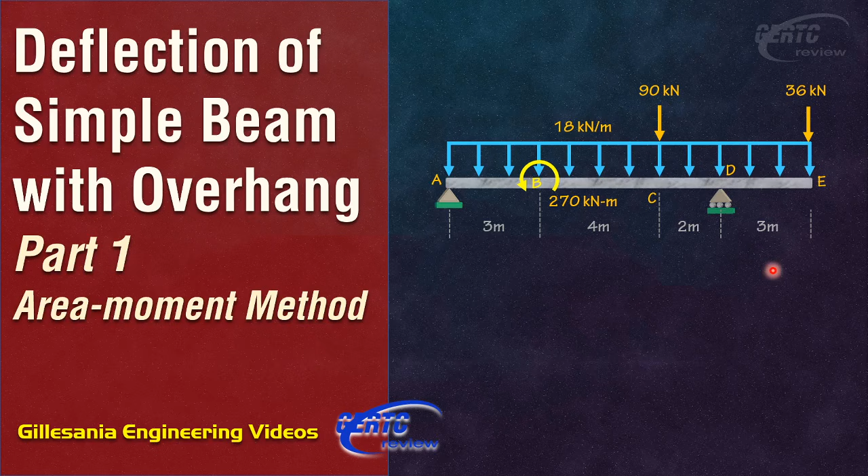Okay, so let's have the problem. Determine the slope and deflection at points B and E of the beam shown. Let's assume EI, the flexural rigidity, is constant throughout the entire beam. The beam is loaded with uniform load of 18 kN per meter all throughout the length, an applied couple of 270 kN-m at B, concentrated loads of 90 and 36 kN applied at C and E. The total length of the beam between supports is 9 meters and the overhang length is 3 meters.

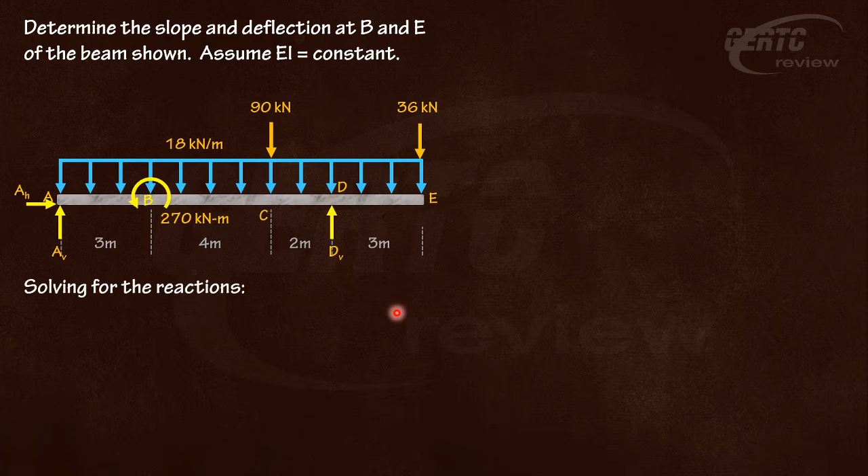Of course, the very first step is to solve the reactions. We have here a roller and a hinge support. A roller has one reaction and a hinge has two reactions. Let's call these reactions AV and AH for A and DV for the roller at D. Summation of moment about point A equals 0: 18 times 12 times 6 plus 90 times 7 plus 36 times 12 minus 270 minus DV times 9 equals 0. So the vertical reaction at D is 232 kilonewtons.

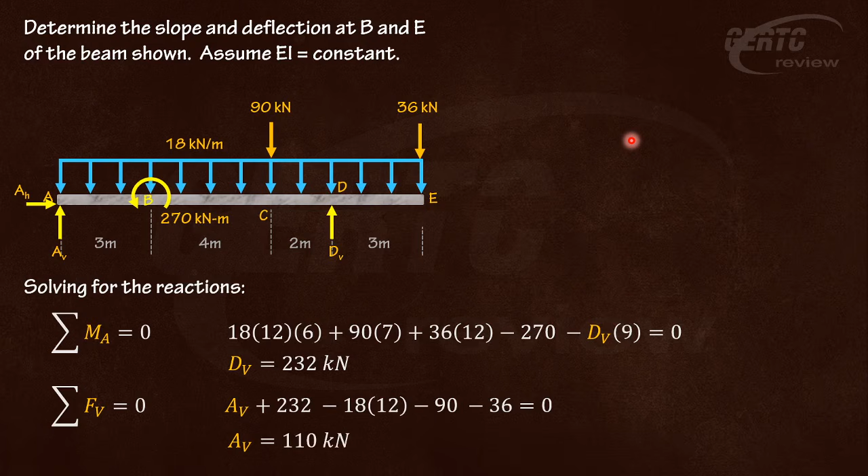Then summation of forces vertical equals 0: AV plus DV, with DV equal to 232, minus 18 times 12 minus 90 minus 36 equals 0. Then A vertical equals 110 kilonewtons. And summation of forces horizontal equals 0, so obviously AH is equal to 0. We don't have a horizontal reaction at A since the loads are all vertical.

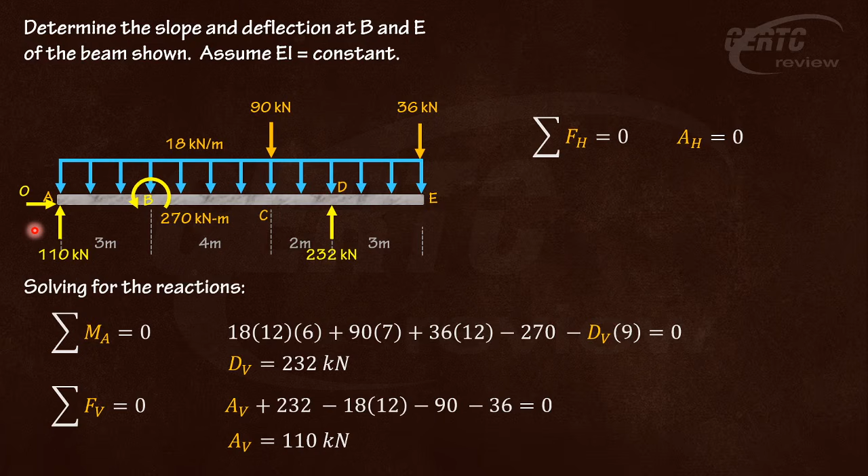Now, let's solve first the deflection at B using the area moment method. Most students draw immediately the moment diagram by parts. That should not be the case. You should do first the elastic curve, and from that elastic curve, you analyze which part you should analyze first and what your reference is. To what point should you take your moment diagram by parts? Let's draw it here so we won't run out of space.

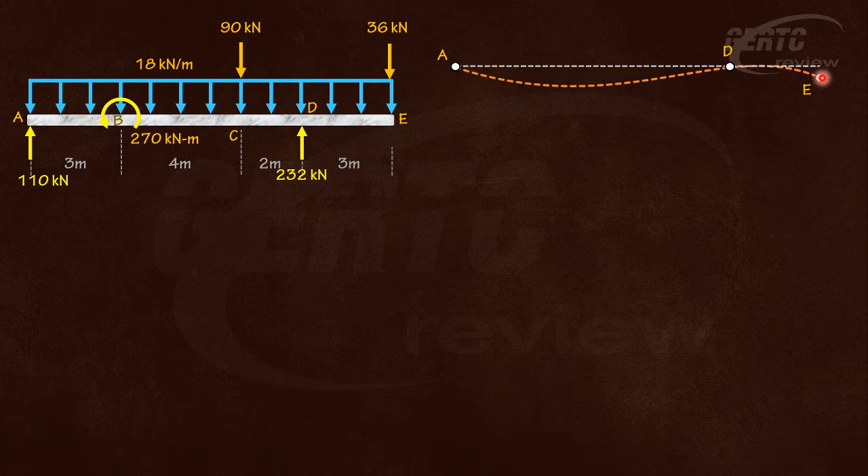Alright, A, and this is our D. This is our elastic curve, just an approximate elastic curve. Since D has no settlement and also A, the points A and D will lie on this horizontal line. Your E, of course, will have a different position; it has deflection. This is 9 meters. So how should you start?

Whenever you use the area moment method, you have tangents to the elastic curve. So where should you start? What's the principle? You start at known points. The known points here are A and D. You can draw the tangent at A or at D, it's up to you. Let's draw a tangent to the elastic curve at A. So this is it.

Now, this is determinate; we know all the reactions. With that tangent, no problem, we can solve all the deviations of the tangent line to the elastic curve at any point. But we will prioritize this one because D is known; D has no deflection. We call this the deviation of point D from the tangent line drawn through A.

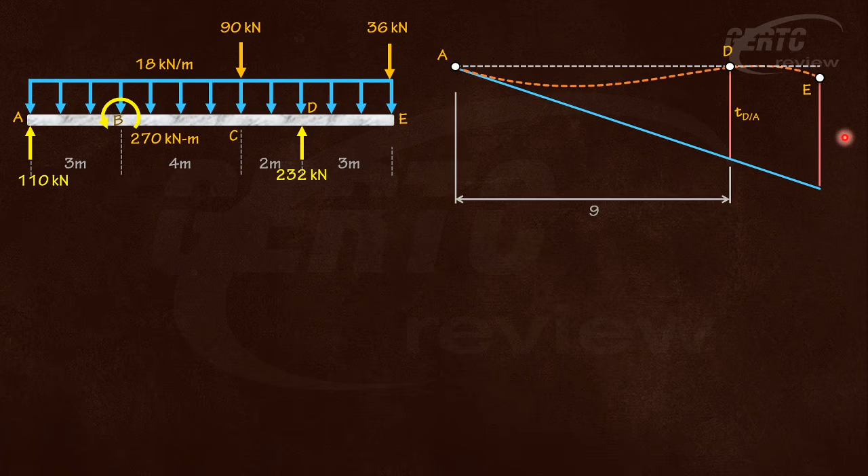Later on, we will also solve the deviation of point E from the tangent line drawn through A. And if we are after the deflection at B, you also need the deviation of point B from the tangent line drawn through A. But we will start from D, because D is known while B and E are unknown. They are known horizontally but not vertically.

Okay? So, that's it. And by the way, this is also your slope already. The slope or the angle of this blue line here, tangent through A, from the horizontal is the slope of that, the slope at A.

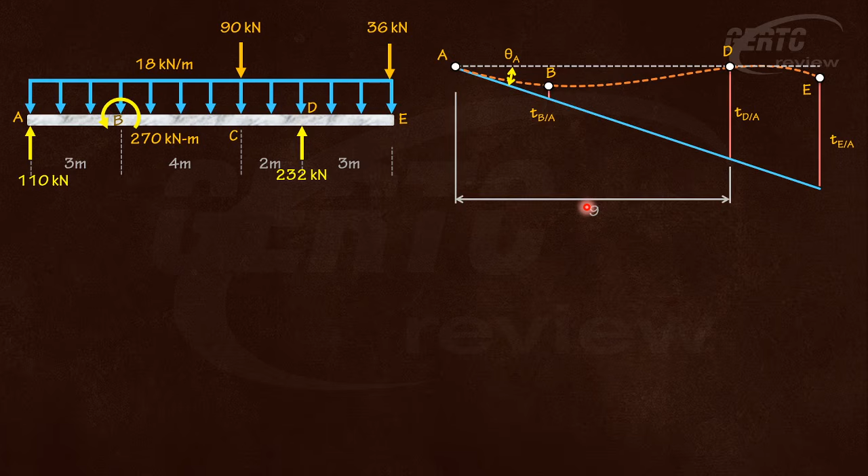Of course, we have to take note of the two theorems involved in the area moment method. The first theorem states that the change in slope between the tangents drawn to the elastic curve at any 2 points A and D is equal to the product of 1 over EI multiplied by the area of the moment diagram between those points. So, the first theorem is for the area. The second theorem is for the deviation.

The deviation of any point D relative to the tangent line drawn through any point A in the direction perpendicular to the original position of the beam is equal to the product of 1 over EI multiplied by the moment of an area about D of that part of the moment diagram between points A and D.

We have discussed that. If you have not watched the first video and you are reviewing area moment, I suggest you watch that video. It's in our playlist, the deflection of cantilever beam. I discussed there fully the principles behind area moment.

Okay, so let's now draw the moment diagram by parts. We want to get the deviation TDA. So I want the moment diagram between A and D only, and the centroid of those moment diagrams from D. So I will draw it about D. Let's draw the moment diagram at D. Dito tayo magre-reference sa D. So ito yan.

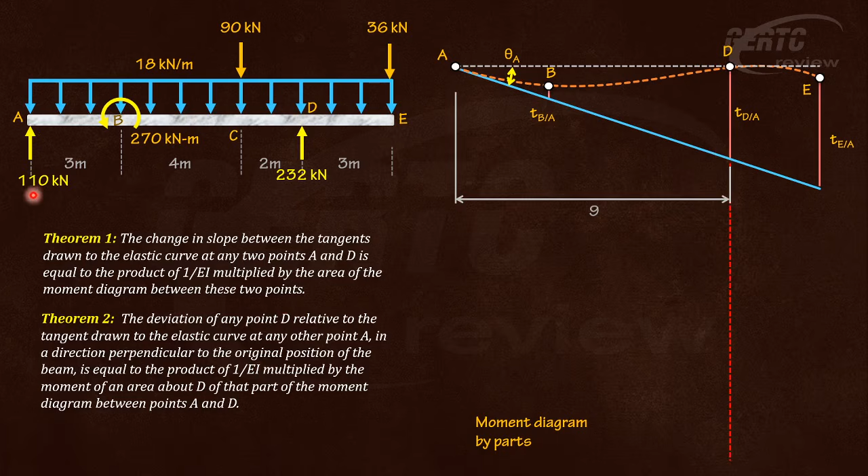Okay, so let's do first the 110. 110, this is a concentrated load, so that is triangle in shape. 110 times 9, so that's 990 kilonewton meter. I will not put the unit anymore. So the area of this can now be solved: 1/2 times 9 times 990, or 4455.

And I also need the centroid of that from the point. The point is D, the tangent is through A, so we are solving TDA. The centroid of that from D is 1/3 of 9, that is 9 over 3, 3 meters.

Then next, the uniform load. Let's do the diagram for the uniform load, up to here only. I don't need to draw the diagram on the right side, because I'm only after TDA, unless we will use it later on. All right. So let's do AD first.

For the uniform load, it will be a spandrel of parabola. This is the shape: 0 and then parabolic, second degree. The moment here is equal to 18 times 9 times kalahati ng 9, 9 over 2. That's negative 729. Negative because it bends down. Take note, I am getting the moment at D, so that is negative moment. That's a second degree curve, a spandrel of parabola.

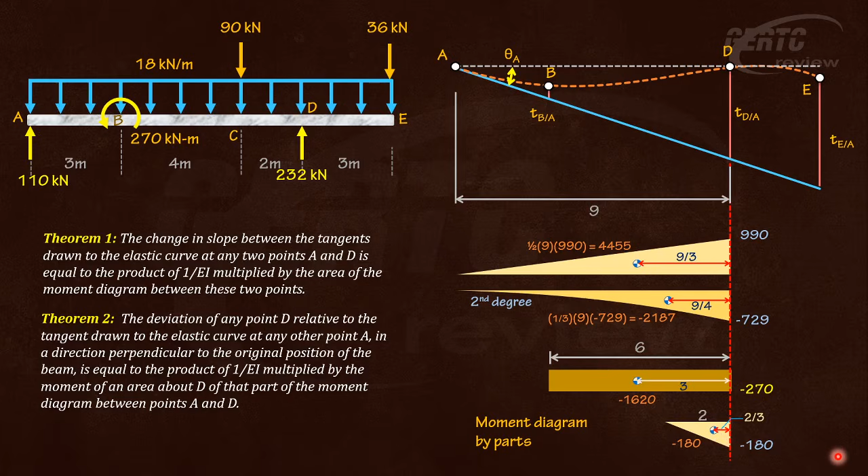So we are now ready to compute the deviation. The deviation of point D from the tangent line drawn through A, TDA, equals 1 over EI times the area of the moment diagram between A and D times the centroid, the first moment of area about D. So we already have the centroid, so we have no problem for that.

Alright, substitute the values. So we have 1 over EI times 4455 times 9 over 3 minus 2187 times 9 over 4 minus 1,620 times 3 minus 180 times 2/3. This is it. Then, if you simplify that, it will become 3,464.25 over EI. Our answer is just in terms of EI.

So, actually, if you have the value of EI, then you can get it in mm or meter. By the way, the unit of this is kilonewton meter cube, because the area of the moment diagram is kilonewton meter multiplied by meter, the area, and then multiplied by the moment arm, making it kilonewton meter cube. Now, with TDA known, we can now solve this immediately.

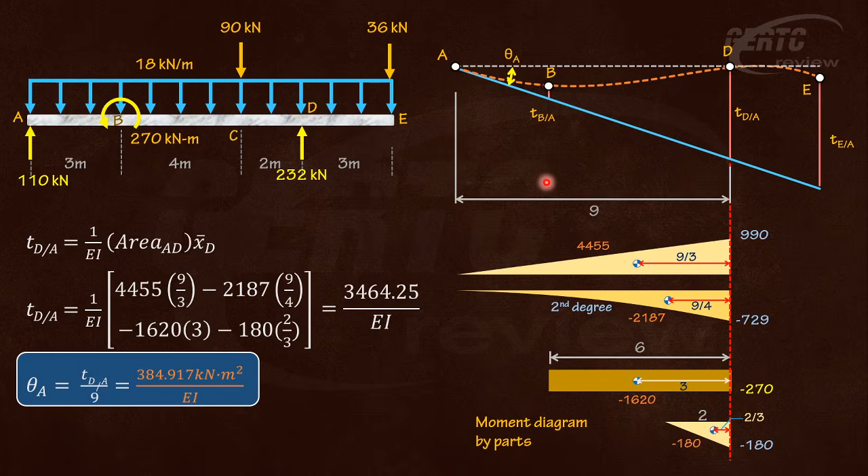So, we have solved already TDA. Let's now solve for TBA so that we can solve the deflection at B. Now, to solve for TBA, let us draw the diagram. We need a diagram between points A and B only. So, I only need this part here. I'm not interested with that anymore. As you can see, it will only involve the diagram from the concentrated load and from the uniform load.

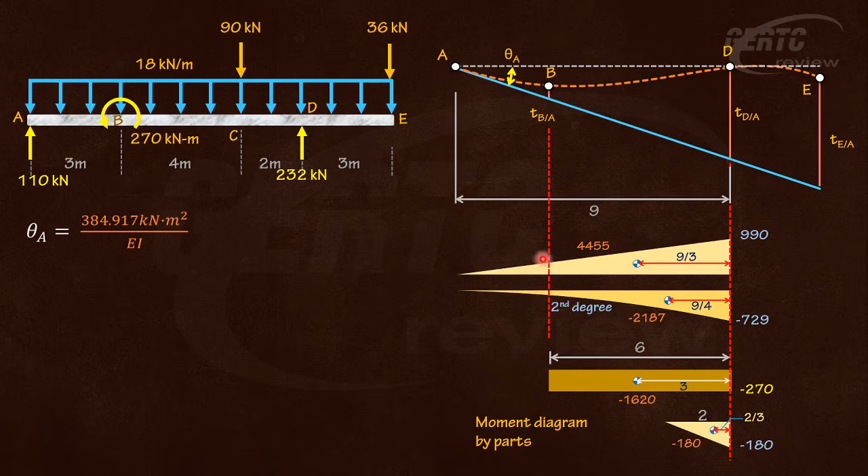Let's expand this part, A and B. How much is this? No need to use ratio and proportion. This is the moment caused by the 110. So, that should be 110 times 3, this is 3 meters. So, 110 times 3 is 330. Most students are using proportion to get that. Don't. That's the diagram, moment caused by the concentrated load.

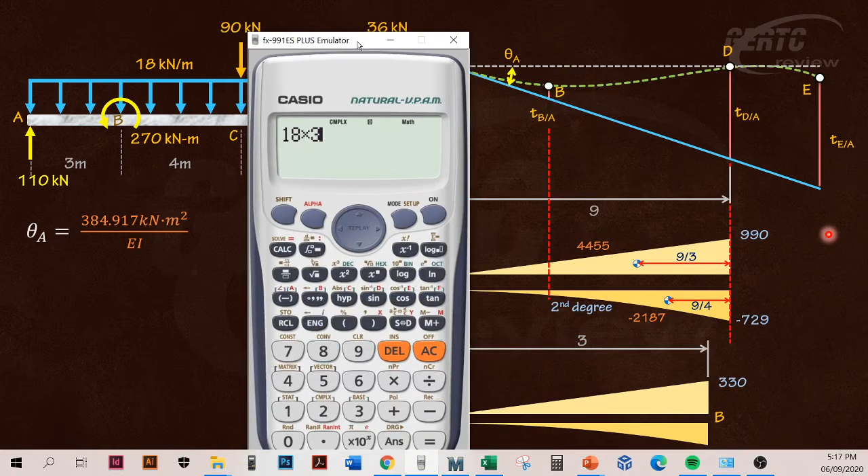And this one is the moment caused by the uniform load. So, that will be 18 times 3 times 1.5. I will show you how to get that. 18 times 3 times 1.5, that's 81. Of course, negative. 81 for this one. Anyway, let's complete first the data.

The area of this is 1/2, 3 times 330. So that's 495. And then the centroid is 1/3 of 3, which is 1 meter. So this is 81, I already computed that. That is 18, look at this part. 18 times 3 times 1.5. So this is it, 81.

Then the area is 1/3, since again this is a second degree curve. 1/3, 3 times negative 81, so that's negative 81. And then the centroid is 1/4 of 3, or 3 over 4. So we can now solve the deviation of point B from the tangent through A, TBA.

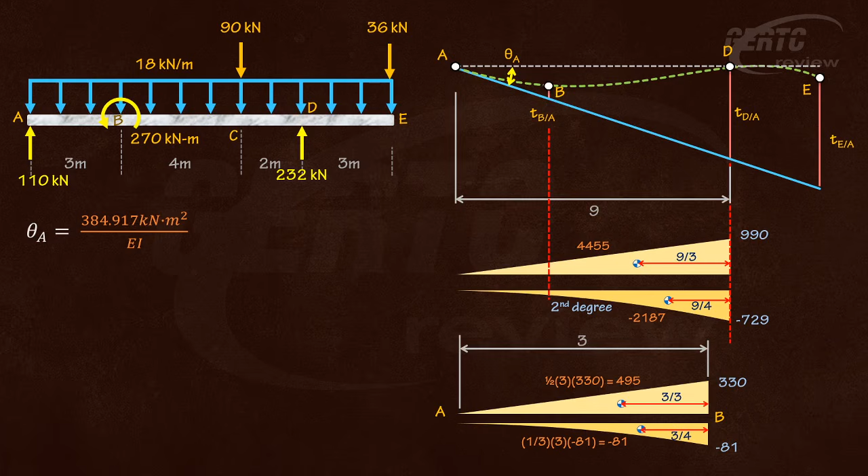Okay? So, our TBA is equal to 1 over EI times the area of the moment diagram times X-bar from B. So, 1 over EI times 495 times 3 over 3 minus 81 times 3 over 4. Okay? That's equal to 434.25 over EI.

By the way, I forgot to mention this. There is a sign for the deviation. Why is this positive? What's the meaning of that? Okay, the deviation is positive if the point in the elastic curve is above the tangent. If the point in the elastic curve is above the tangent, the sign of the deviation is positive. Otherwise, it's negative. So that's the reason why we got TDA a while ago positive, and of course here TBA is also positive. All TBAs here are positive because all points in the elastic curve are obviously above this tangent line.

Okay, so now that I have my TBA, how can you solve the deflection here? This deflection delta B. How will you do that? Okay, well, most students are doing proportion. This is to that as this is to that. Well, there's nothing wrong with that. But that's why, if you notice, I solved the theta A. Because this height here is 3 meters times theta A. That's it. You don't need to use proportion anymore. This is 3 meters from A to B horizontally. 3 times the slope, that is it. This is 3 theta A.